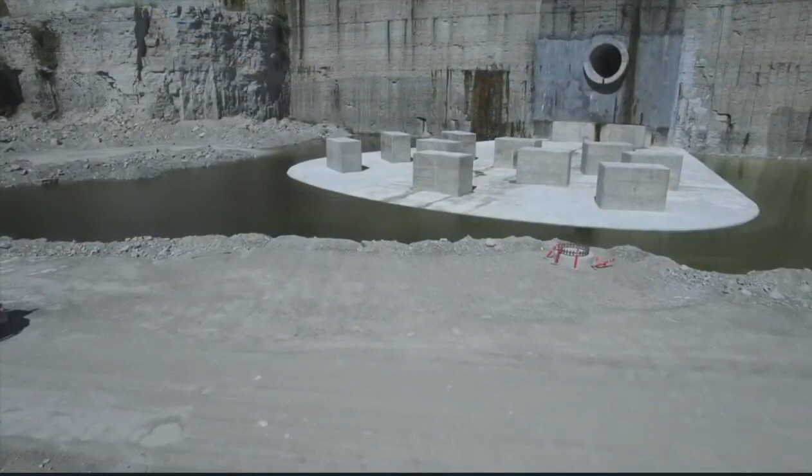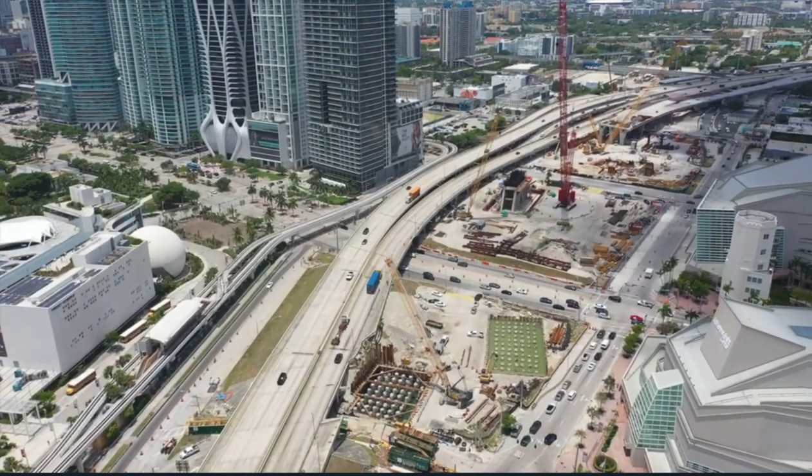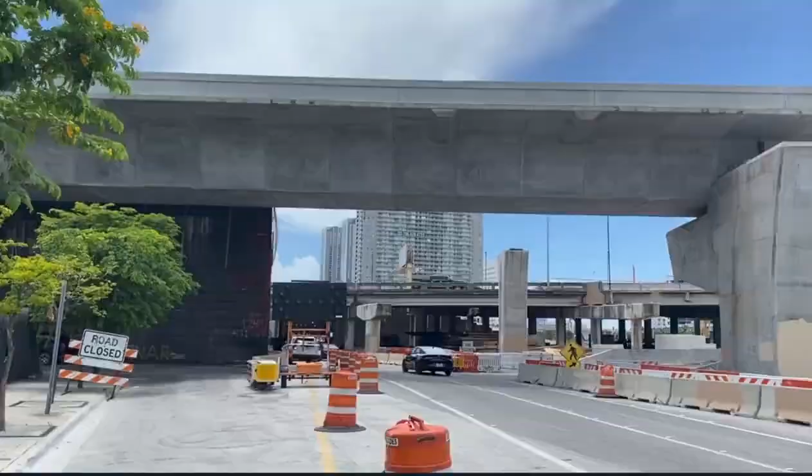Miami Double-Decker Project. The Miami Double-Decker Project has an estimated cost of $840 million and should be completed by mid-2026. Its goal is to create better traffic flow between neighborhoods, which is very much needed in the congested city. There will be a two-tiered extension to the existing I-395 through State Road 836 and I-95 that will add more lanes and separate connector ramps to decrease congestion.

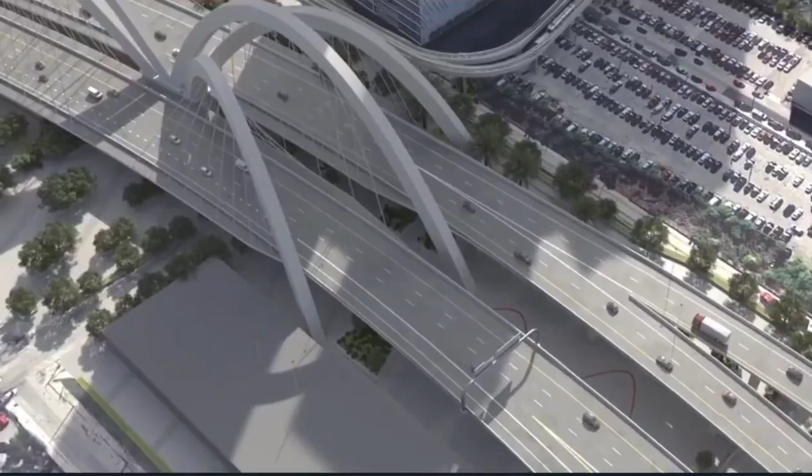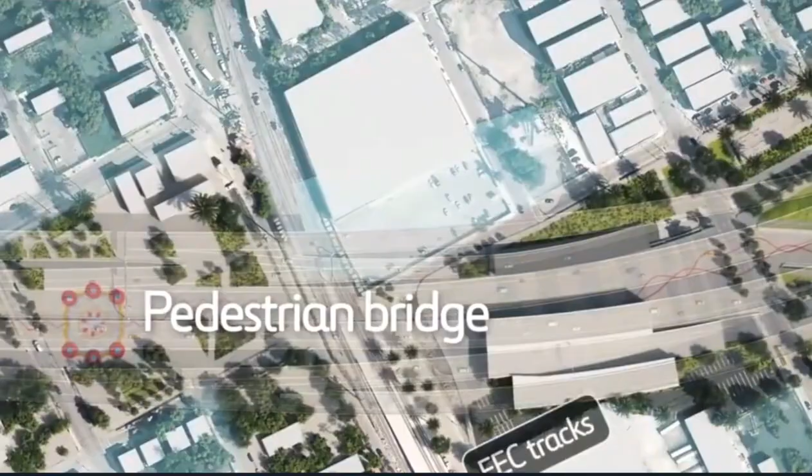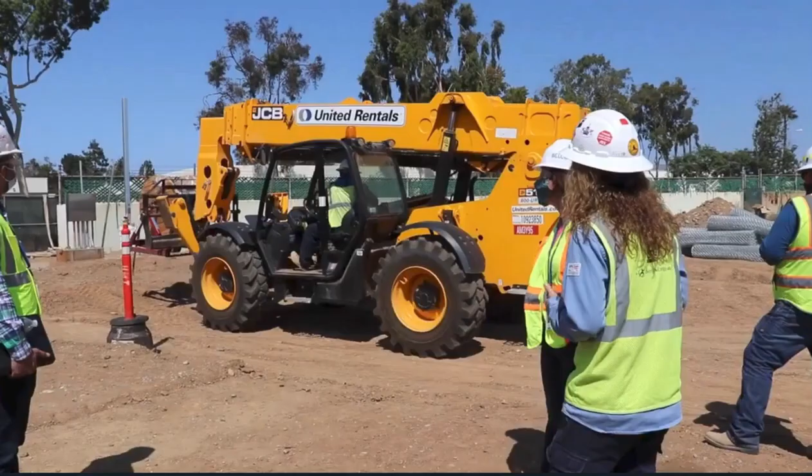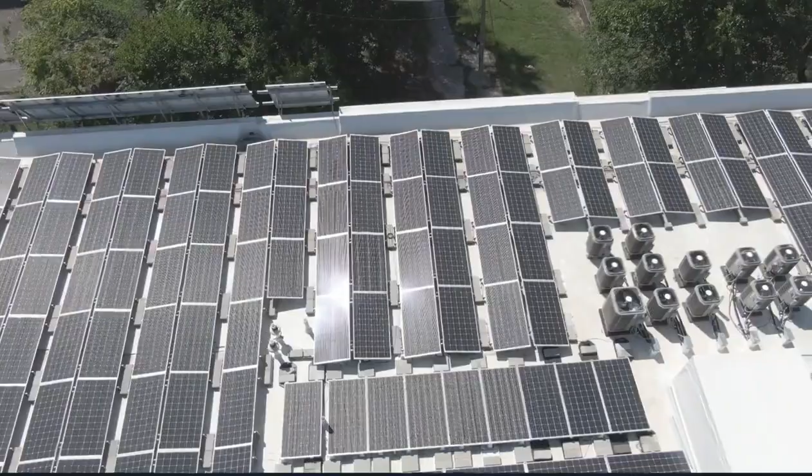Sanborn Solar Power Facility. The Sanborn Solar Power and Battery Energy Storage Plant is located in California on a plot of land leased from the Edwards Air Force Base. In 2022, the project cost exceeded $950 million for over 2.5 million photovoltaic solar cells and over 100,000 batteries.

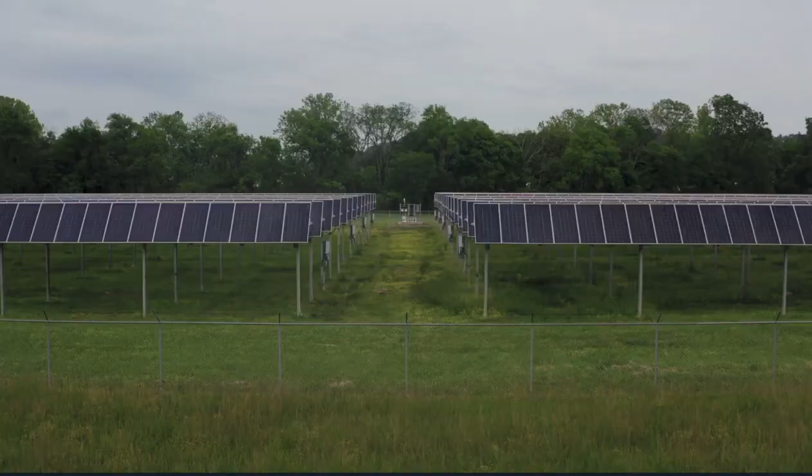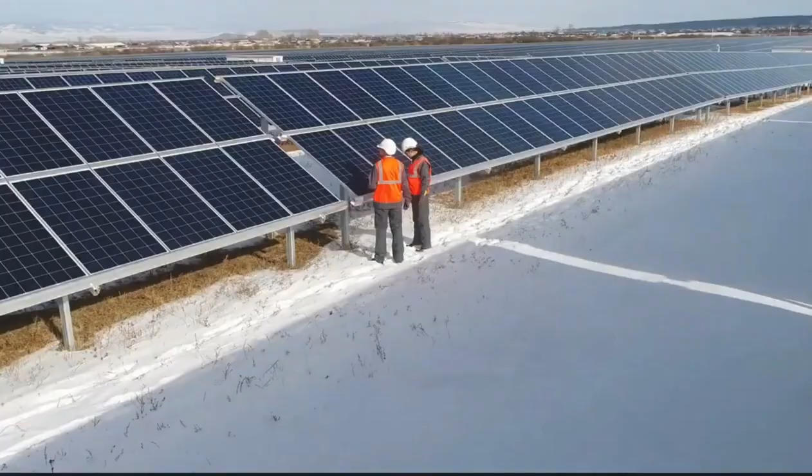The project is split into two phases set to end Q3 of 2023, and the first phase, first financed in 2021, is now functional. It provides 345 megawatts to the grid and holds 1,590 megawatt hours of battery storage. The end result will be clean energy for 164,000 households, and 320,000 tons of carbon dioxide will be offset from the atmosphere annually.

The renewable energy company TerraGen was scheduled to complete the second phase of solar panels at the end of 2022 and complete the battery storage by 2023.

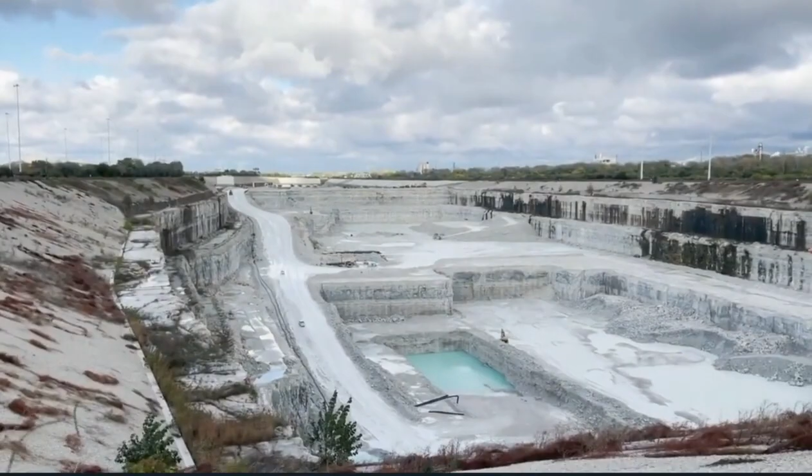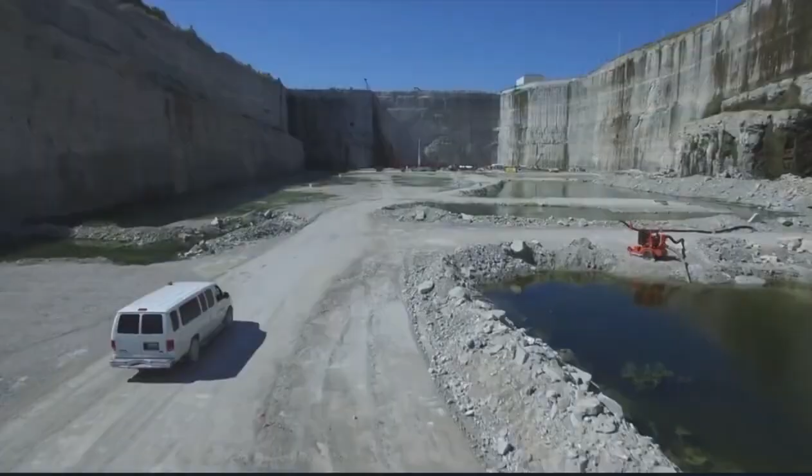Tunnel and Reservoir Plan. Chicago has one of the biggest mega projects in the world right now with its Tunnel and Reservoir Plan. The project aims to reduce flooding and clean up its waterways with a series of large diameter tunnels and vast reservoirs. The project collects and stores combined stormwater and sewage that would otherwise overflow from sewers into waterways during rain. Then it's pumped to plants to be cleaned and released.

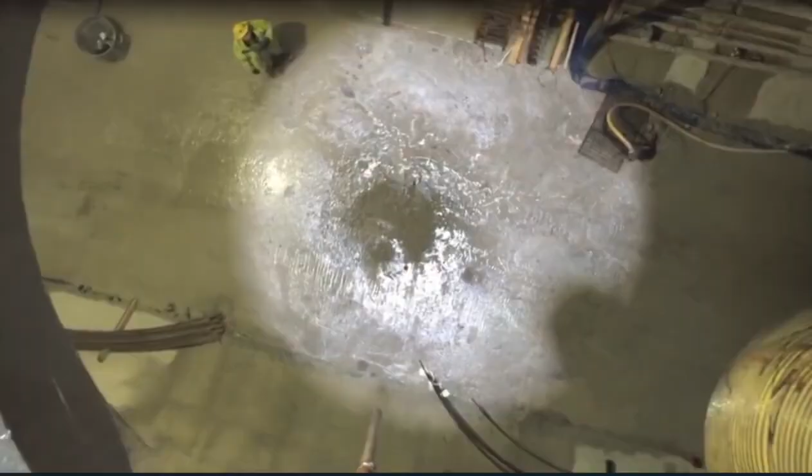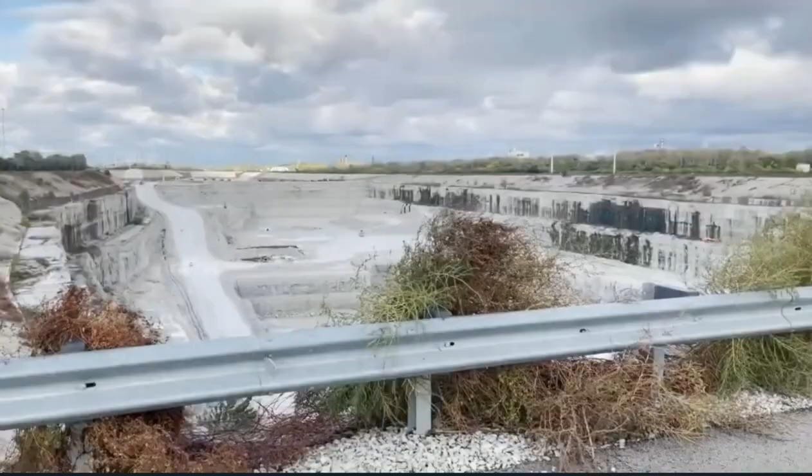The project was first commissioned in the 1970s and was expected to be completed in the 80s. But there was a tiny delay of just over 50 years, and the completion date is now 2029. The entire project has a price tag of $4 billion.

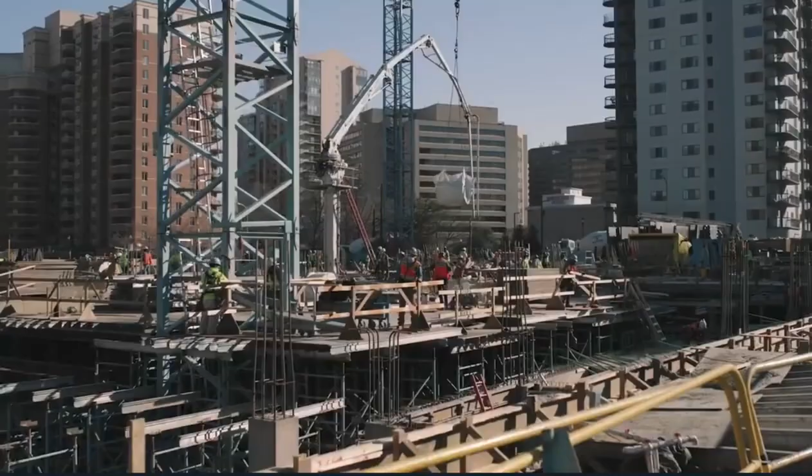Amazon HQ2. Jeff Bezos isn't running the show anymore, but the show must go on. So Amazon's new corporate headquarters is under construction in Arlington, Virginia. HQ2 was announced in September 2017, and the design has been released. The new spot will host 2.8 million square feet of office space and 2.5 acres of public space.

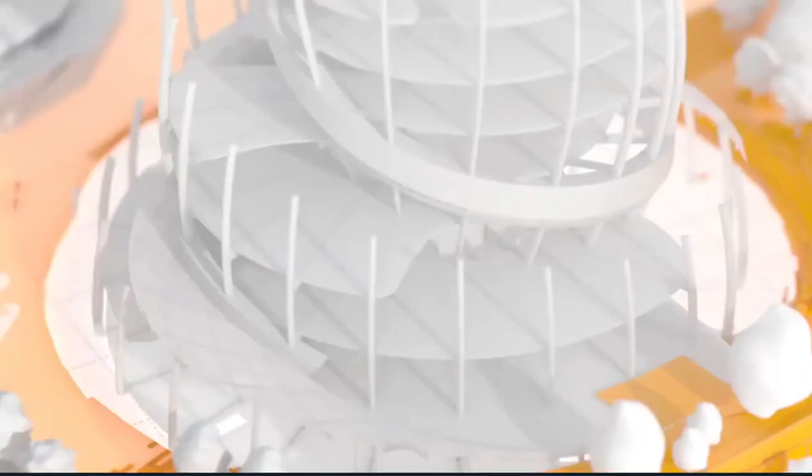The centerpiece of the property is the Helix, a 350-foot tall glass structure. The Helix will include tree-covered walking trails for employees to walk through and will be just one of the buildings that make up the new headquarters.

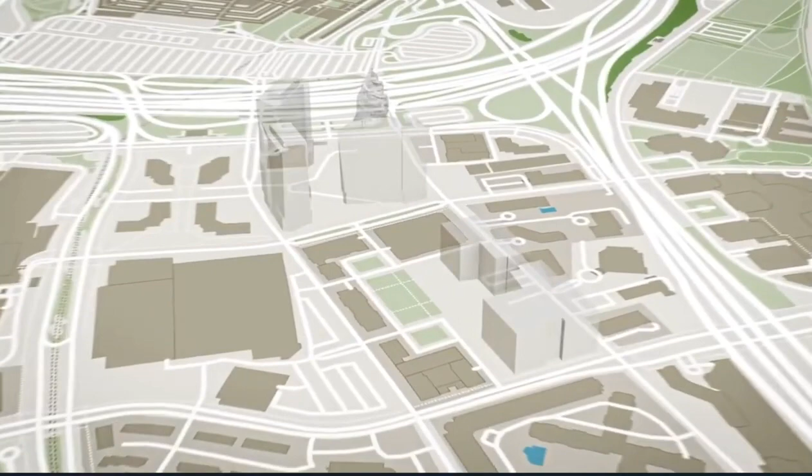Amazon has its eyes set on being extremely sustainable, with a goal of being 100% dependent on renewable energy, which is also part of its pledge to be net zero carbon across its operations by 2040. The total cost of this mega project is estimated to be $5 billion.

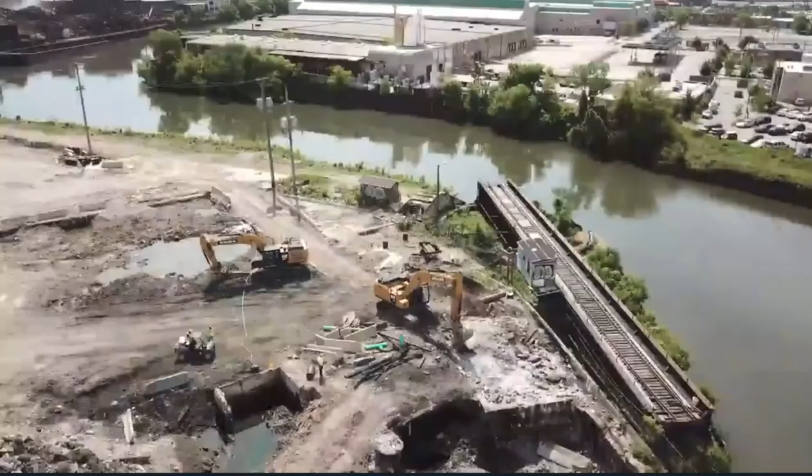Lincoln Yards, Chicago. Back to Chicago for its highly ambitious real estate development project, Lincoln Yards. It's being built on the Chicago River, just west of Lincoln Park, for $6 billion.

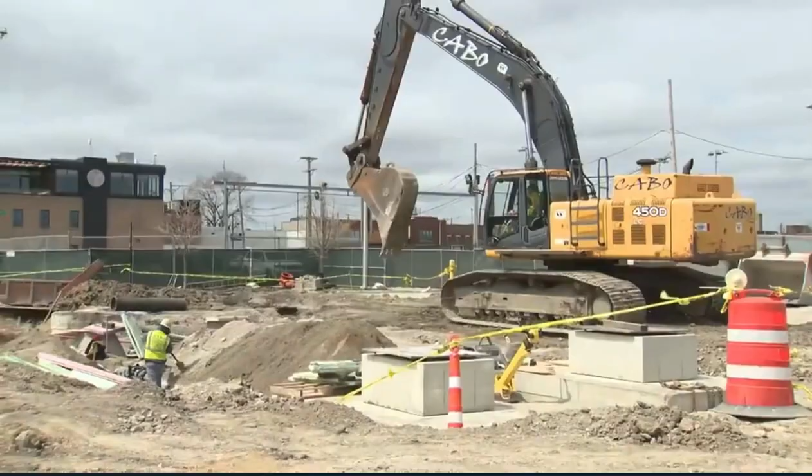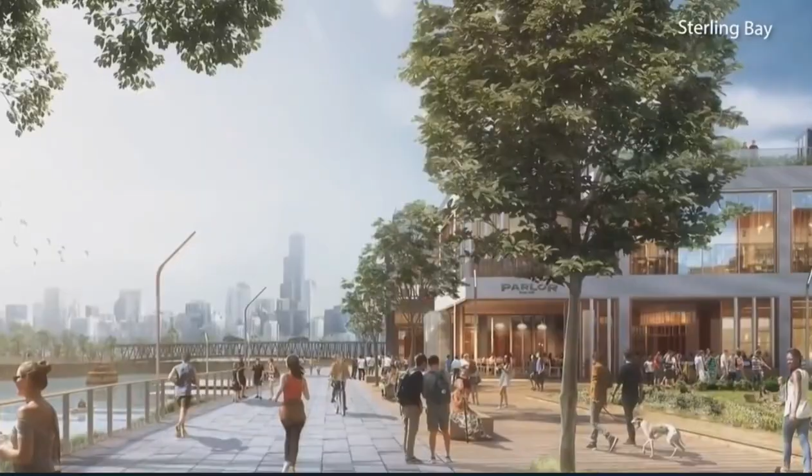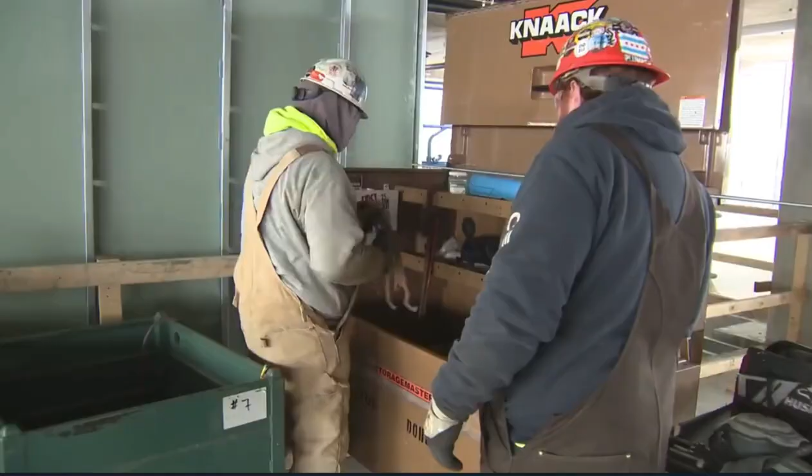LaGuardia redevelopment. LaGuardia Airport has had a bad rep until recently. There had been reports of leaky ceilings, faulty escalators, subpar toilets, and obvious degradation.

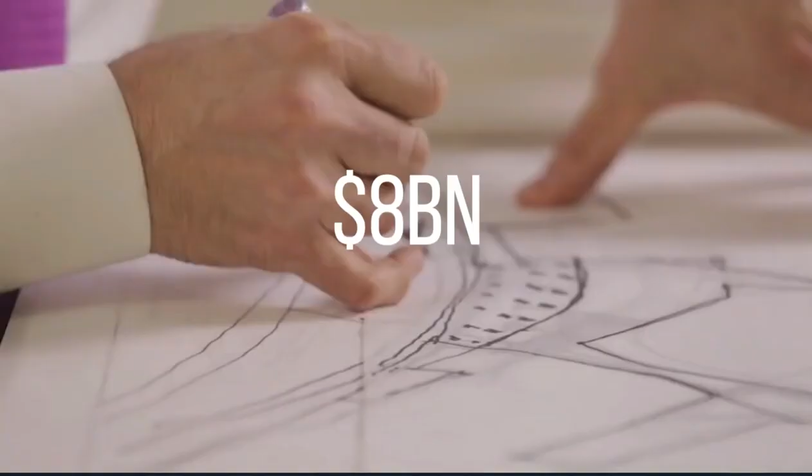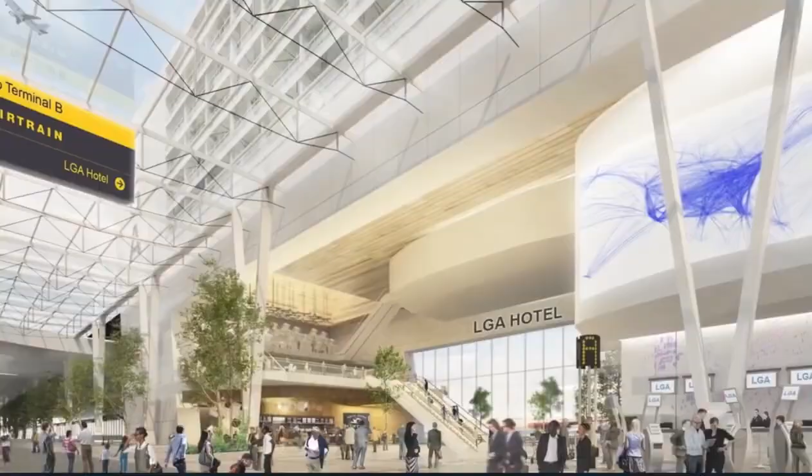6 years and $8 billion later, LaGuardia now has a state-of-the-art central terminal with 35 gates, retail outlets, 2 steel sky bridges, and features 2 concourses. It's 85% bigger than its replacement and will also feature restaurants and a huge parking facility.

The Terminal B of the airport also underwent a complete makeover to now feature an environmentally conservative concept, achieving 43% water efficiency and saving 18% in energy costs. In addition, Terminal C has been remodeled and is now open to rave reviews. The bulk of construction was funded by Delta Airlines and was completed by mid-2022.

Texas Bullet Rail. The Texas Bullet Rail is a speed rail between Dallas and Houston and will utilize the technology of the famous Japanese Shinkansen rail line in its construction. This project, estimated to be completed by 2026, will cost a whopping $16 billion, all to make sure the train can travel its journey in under 90 minutes.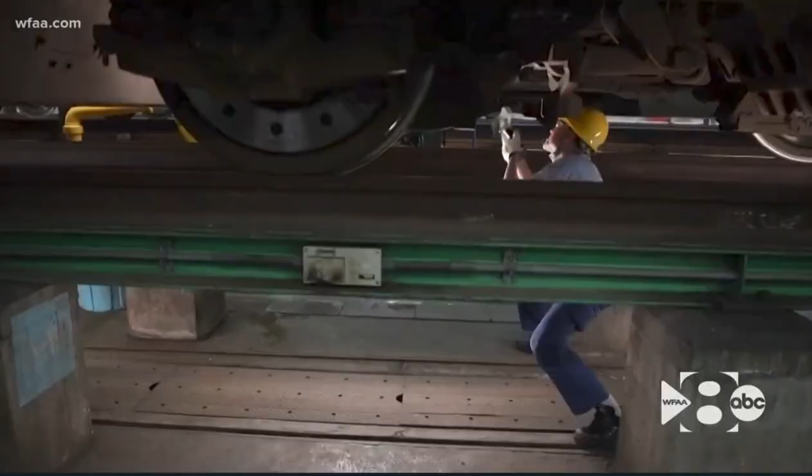The ultimate aim is to reduce carbon emissions along the I-45 highway, which is also the second most dangerous road in the United States. The project seems promising but has received criticism in regards to safety, and landowners wish to seek legal action for their properties being seized to build the railway. Currently, however, financing is being taken care of, and Texas Central, who is behind the project, says everything will continue.

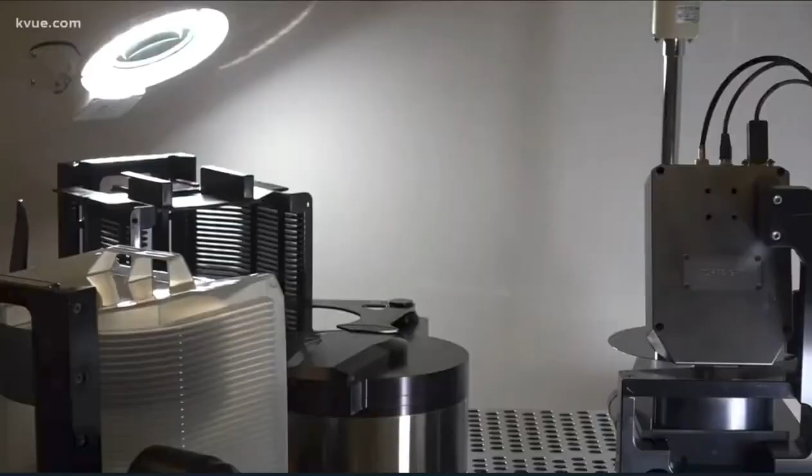Samsung Chip Factory, Texas. This last mega project on our list is brought to you by Samsung. Literally, they're building a $17 billion semiconductor chip factory in Texas to be spread across 1,235 acres. The factory will manufacture semiconductors, which are an essential piece of mobile phones and computers. The site is expected to be completed in 2024 and is considered an important addition to the US economy, seeing as though there are no major semiconductor hubs in the States.

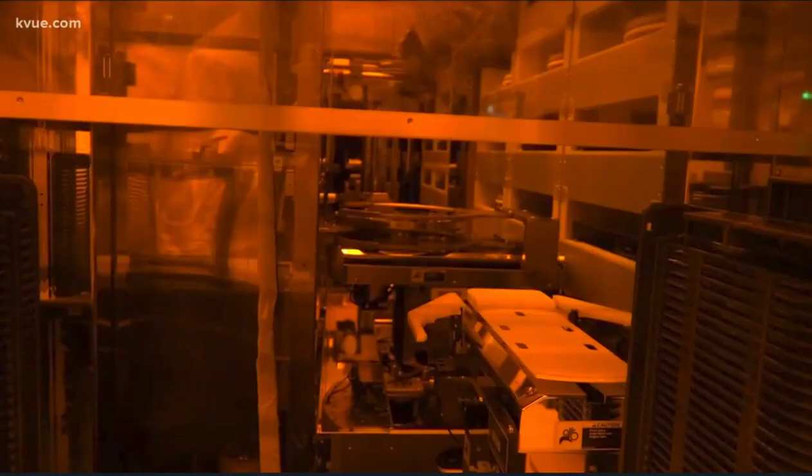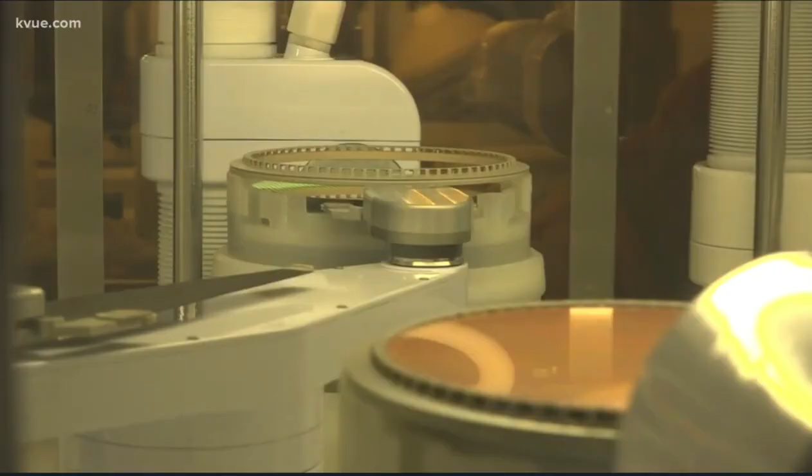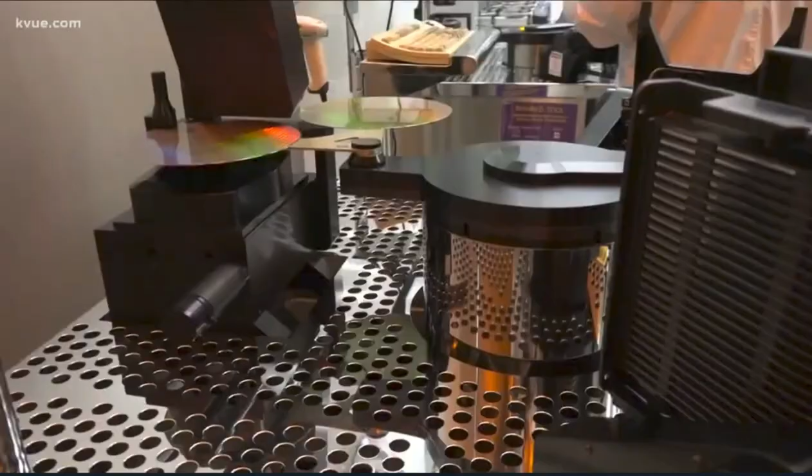But semiconductors aren't the only thing going on here. The facility will also conduct research on artificial intelligence, 5G communication, and high-performance computing. This latest extension to the Samsung workforce aims to add 2,000 more people to its team of 20,000. But get this, Samsung intends to build 11 more chip-building facilities in Texas that will cost a total investment of $192 billion. Now that's a lot of semiconducting.